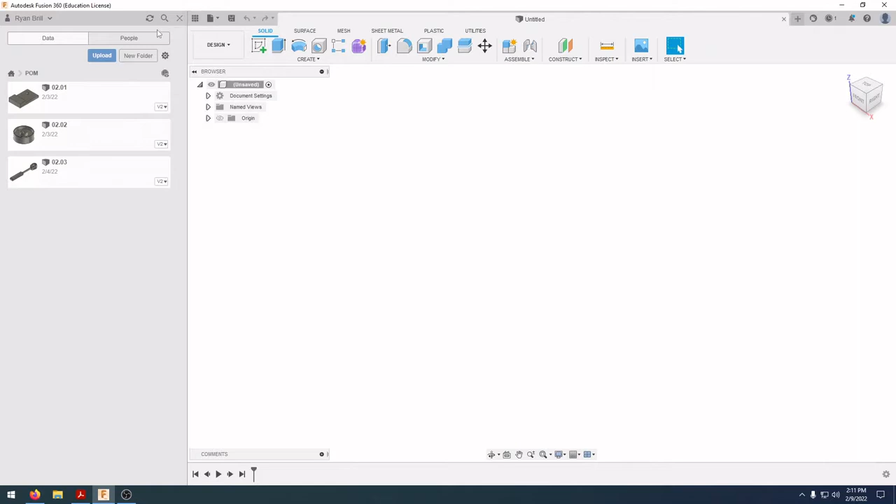So let's go to Fusion 360, and in here what we want to do is make sure that we are in the proper folder in our design area. Click on the waffle and open up our data panel, and in here I'm in my Principles of Manufacturing, right where I want it to be. So what I want to do is save this as 2.4 and click Save.

Now to start out, we're going to create a sketch, and this is going to be on our XZ plane. Remember, Z is on our blue axis, X is on our red, and Y is on our green. So I'm going to select our XZ axis right there.

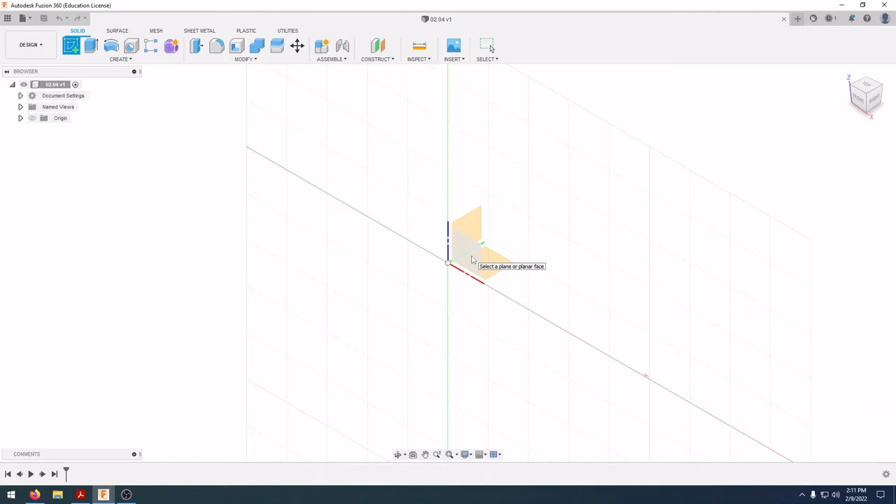We'll look at the prints, and we see that this is 3 inches tall overall, it is 2 inches wide from there to there, and we've got a little knob. What I'm going to do is split this in half and create the left-hand side of this, and then I'll revolve this around that center axis.

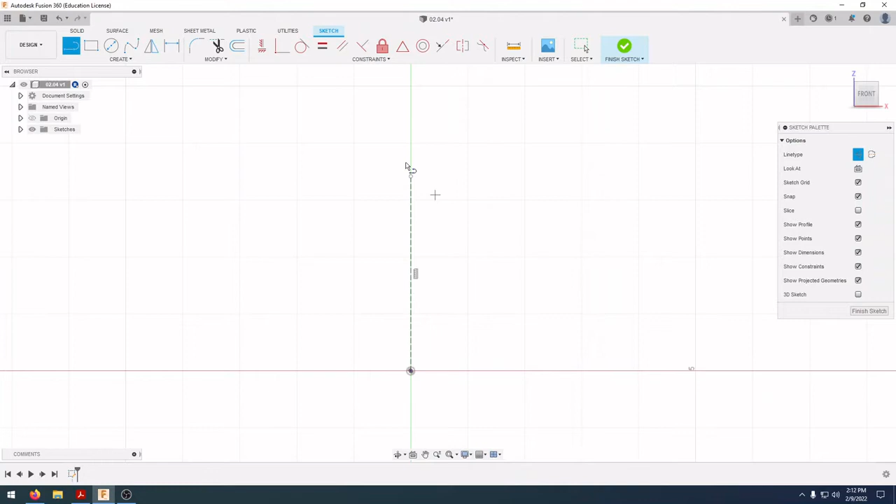So we'll go back to Fusion 360. I'm going to create a line, and I'm going to make this a construction line so that we can revolve around it. I'm just going to go from my origin up at least 3 inches, could be a little bit more. Mine's 3.5 or so.

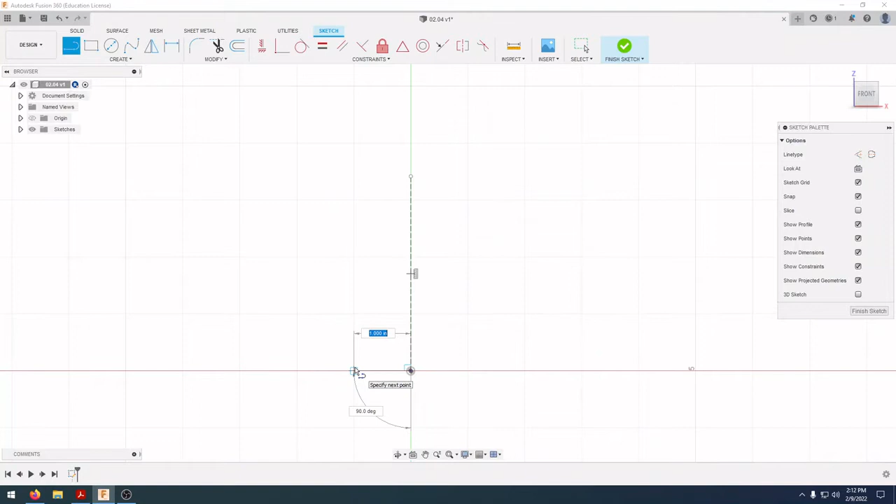Then from there, I am going to make another line, but it's not going to be a construction line, it's going to be a standard object line. According to the print, I'm going to go over an inch, and how I found that is my diameter is going to be 2 inches. I want to take half of that, which is an inch, and click on the center right there. I can type in an inch, hit enter, and then I'm going to roughly create the rest of that shape right there.

So we'll go back and take a look at this again. Overall height is 3 inches, and from the bottom to that corner right there is going to be 2.75, and then finally the width of that corner is 0.25.

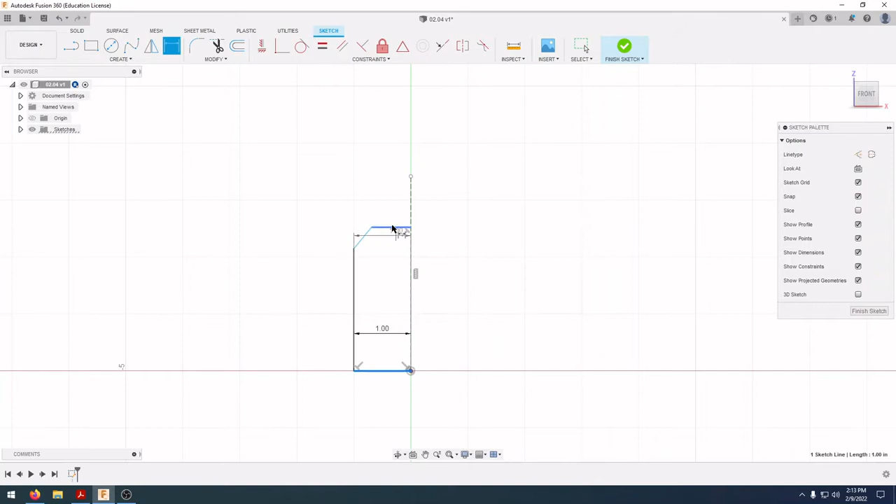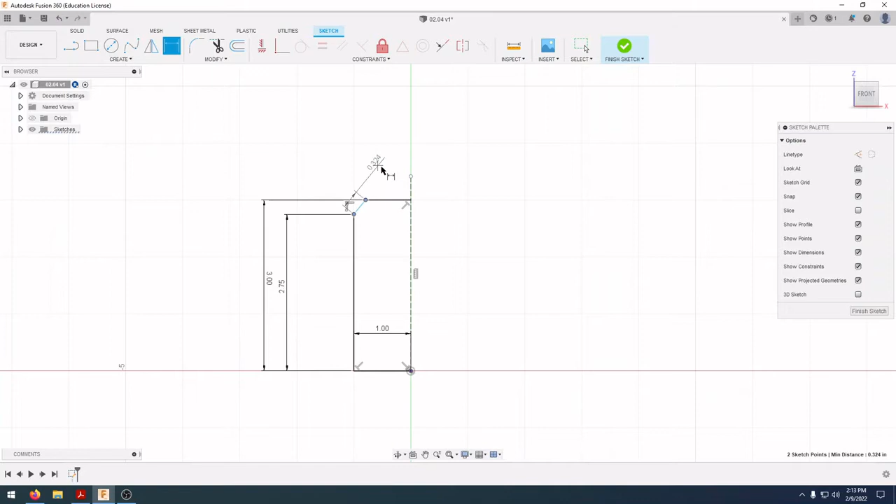So when we're back in here, we'll click on Sketch Dimension or Create Sketch Dimension, or you could also hit D on the keyboard. We go from the bottom to the top, that's going to be 3 inches. Then we go from the bottom to this point right here, that's going to be 2.75 inches. And then at the bottom right there, we go from this corner to that corner, and that is going to be 0.25.

So there we have the rough dimension, or the rough outline of this, and it's fully constrained. What I'm going to do then is create a circle right here that has a diameter of an inch, and we're going to dimension it, and then we will trim away from there.

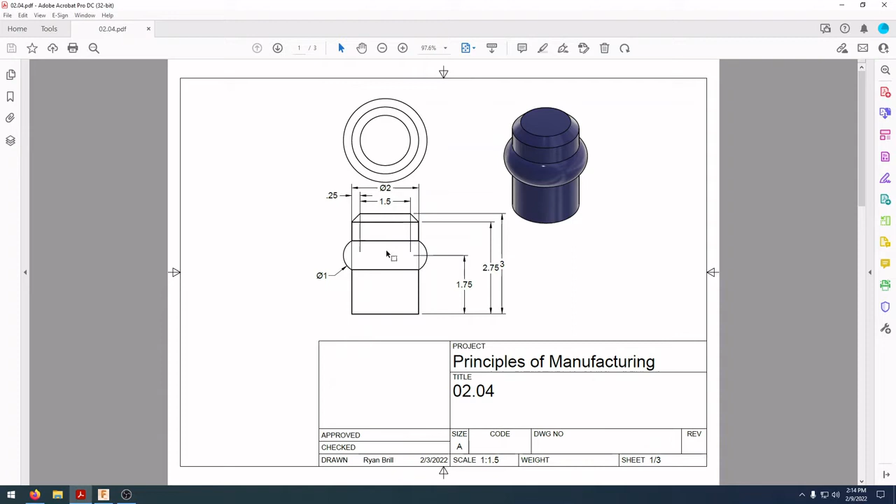So my circle, I'm just going to draw it right there with a diameter of an inch. And we're going to look at the location of it. It is 1.75 up for the center, and it is 1.5 inches from the center to the side, or from the center point it's going to be 0.75.

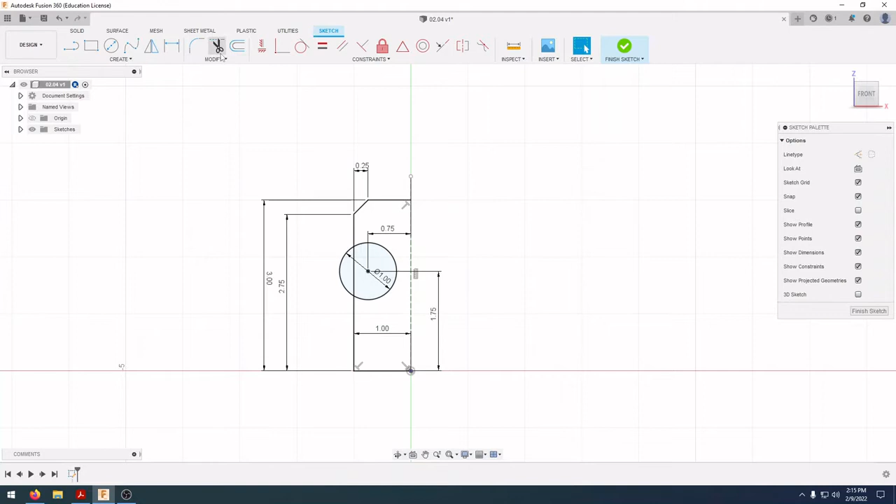So I'll come back here and we'll select our dimension tool. Going from the bottom up, that is going to be 1.75, and coming from our center over, that is going to be 0.75. From there, in our modify area, we're able to trim, and I'm going to trim out the center of this circle right there and that center line right there.

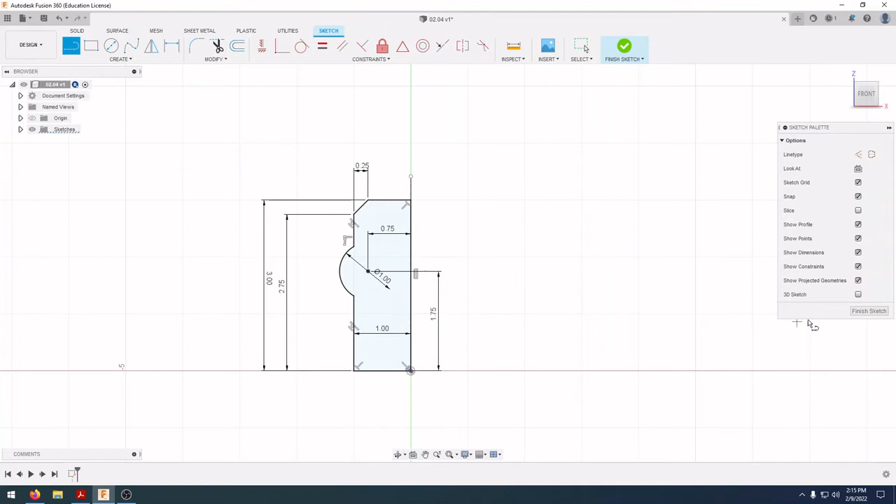So now I'm going to close down this sketch. If you noticed before, I did not have a filled-in area, so if I wanted to revolve this, I wouldn't have been able to, because it was not completely filled in. But I took a line and closed it down, and now we have a fully closed, fully constrained sketch. So I'm going to finish that sketch, and I am not going to extrude it, I'm going to revolve it.

My profile is going to be this profile, and my axis is going to be that construction line I put in before. We're going to go all the way around, and then I'll hit OK.

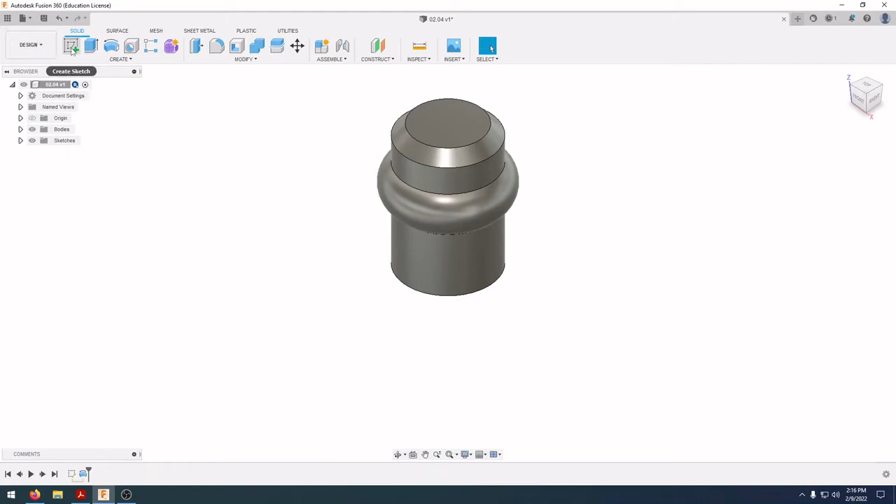The next thing we're going to do is sketch the pathway for our sweep of one of the arms for our wheel. I'm going to create a sketch, but instead of putting this on an actual face, because we just have rounded faces right here, I'm going to put this on my XZ plane so that I get a solid, flat surface to sketch this on.

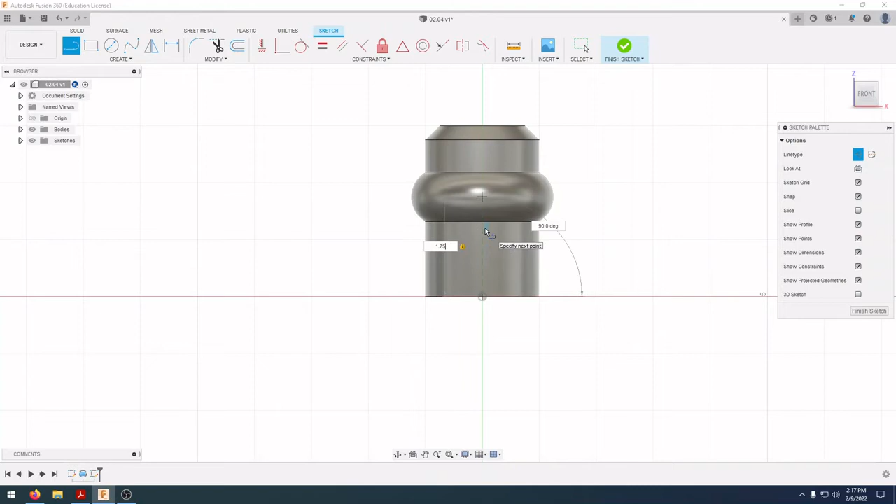The construction line I'm putting in from here to here is going to be 1.75 inches. So back in Fusion, I'm going straight up 90 degrees, 1.75 inches, and that's going to get us into the center of our round right there.

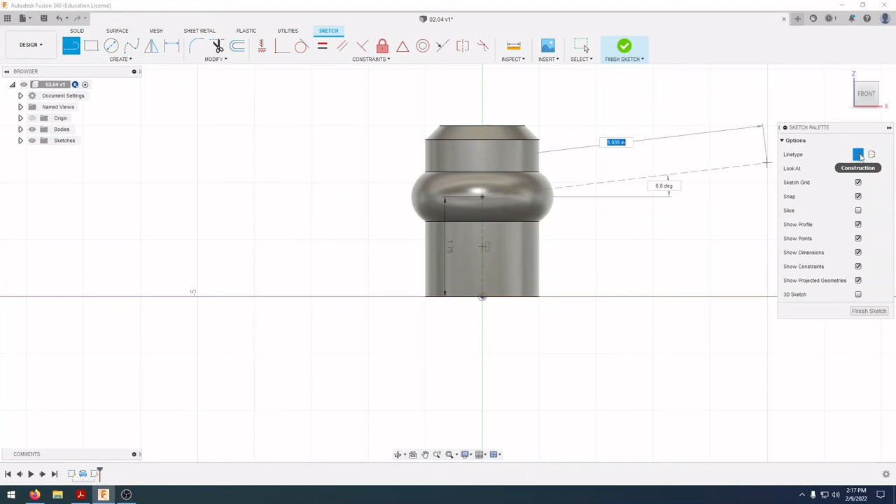The next thing I'm going to do is add a horizontal line there. We're going to have two arcs and then a smaller horizontal line over there. Fusion makes this very easy. I'm going to click on the end point of that - I forgot to turn off the construction, so we want to make sure this is an object line, not a construction line. I'm going to go straight to the left, making sure it's horizontal.

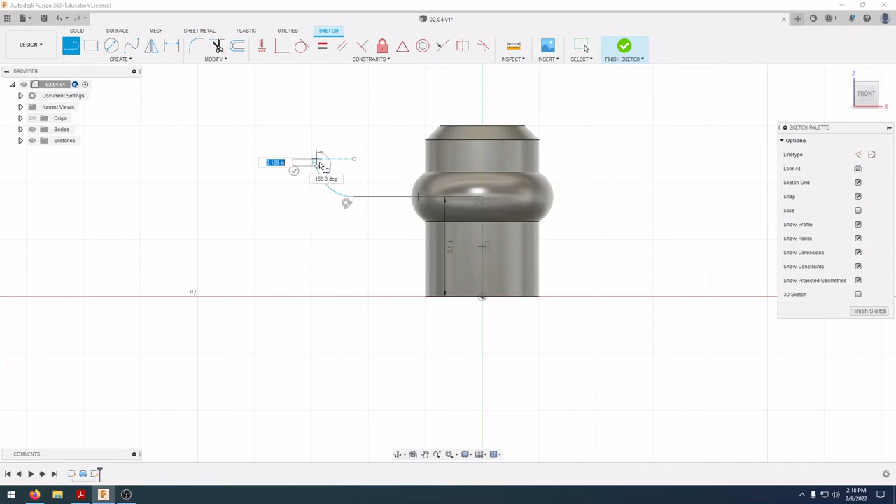Before I start drawing my next line, I can create an arc out of here. I bring my cursor back to the end point, click and hold down, and I'm able to make a tangent arc. Then I let go - I'm not going to dimension anything right now, we'll come back to that later. I do the same thing right here: bring the cursor back to the end point, click and hold, and create an arc coming over here. Finally, we create a straight line coming out from there, and click the little check mark to finish.

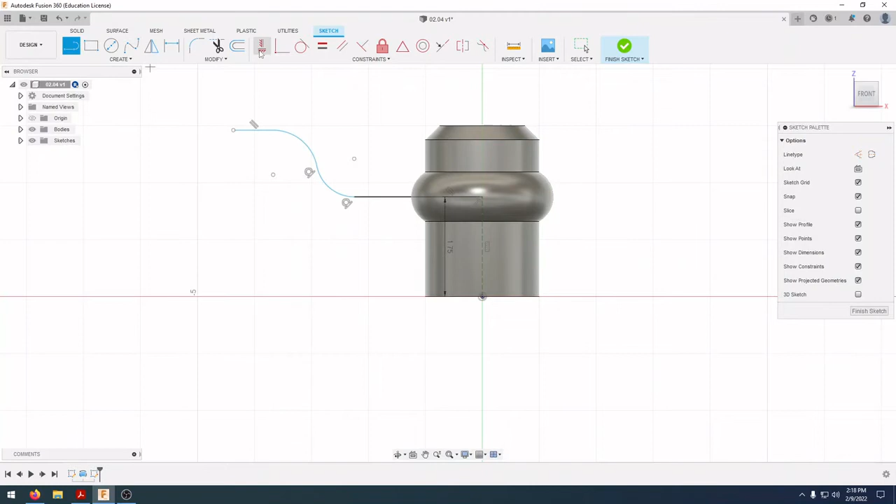Back here, I'm going to type D on the keyboard for dimension. From there to there, that's going to be an inch, and from here to here, that's going to be 2 inches.

I notice here that I lost my constraint of being tangent. If we want to put that back in, we can click on our tangent constraint, click on that arc and that line, and that brings it back in so we have a nice swooping pair of arcs right there.

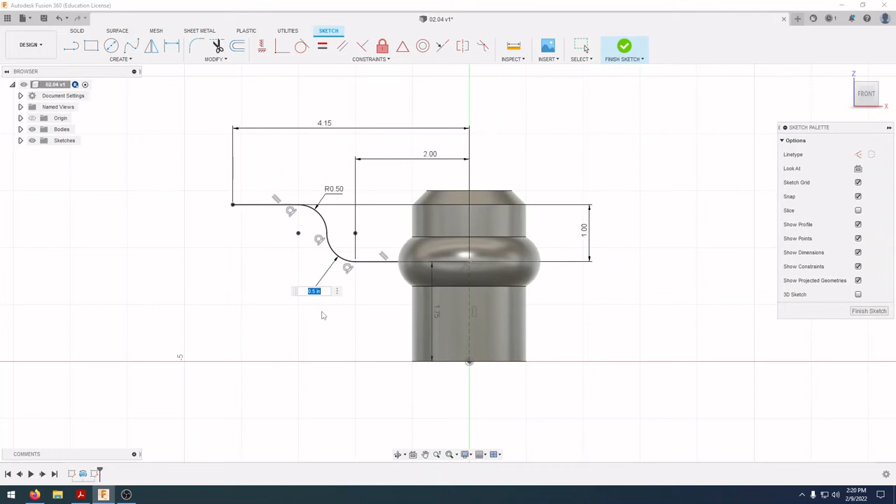Radius of 1 inch, diameter of 2. This is fantastic. If you want to change your dimensions, we can just double click on it and type in 1, press enter. Double click, type in 1, press enter. And now we are finished with that sketch right here.

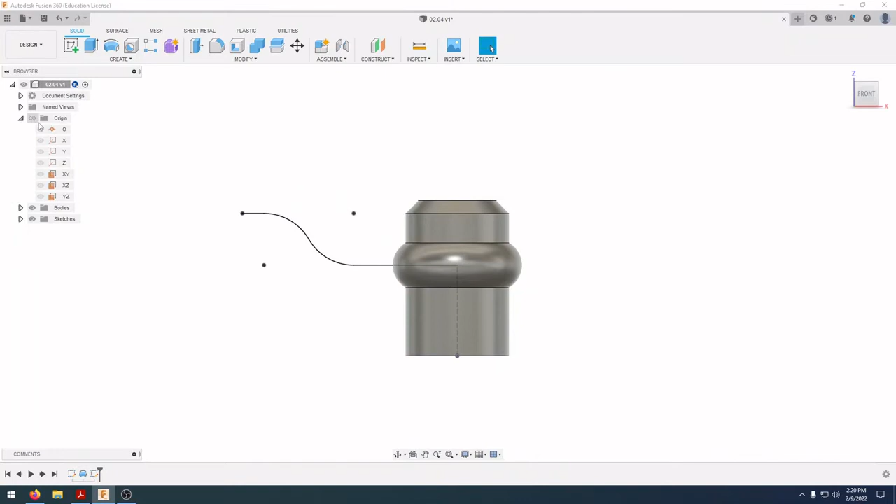So the next thing that we want to do is create a secondary sketch that's going to be on this outside face, parallel with the ZY plane, or the YZ plane.

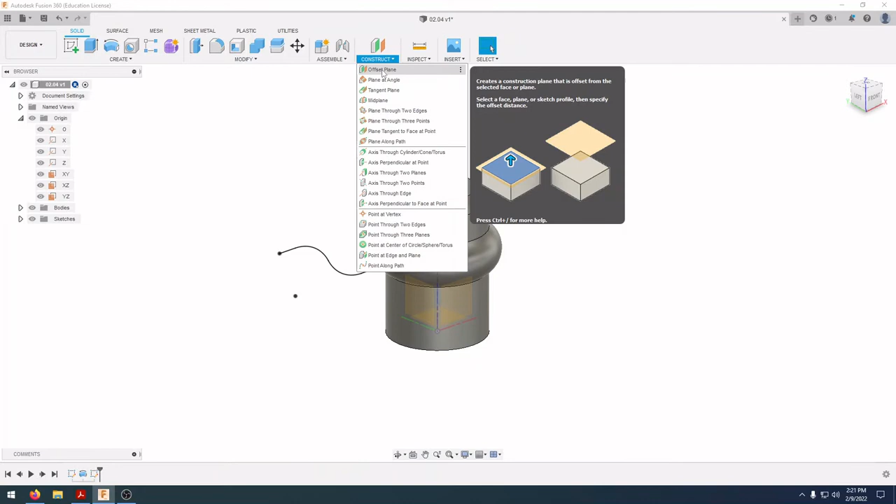So we're going to want to have a work plane out here, so that we're able to make a sketch to follow that, to be able to sweep that tool path we just created. So I'm going to go back to Fusion, and to create that, I'm going to create an offset plane, select my YZ plane, and offset it at negative 4.15.

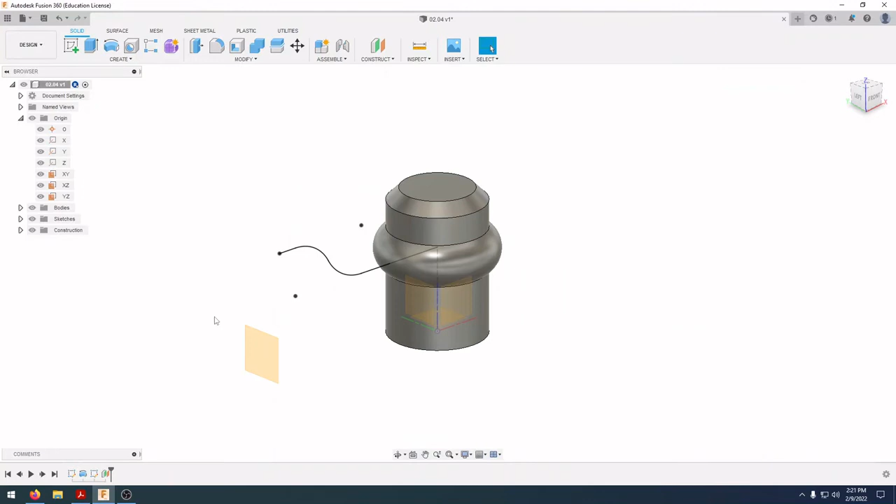And where I got that dimension from is the length from this center line to our edge right here, so that plane needs to line up perfectly with the end of that sketch. After I have that construction plane in there, I'm going to create a sketch and put it on that construction plane.

And I am going to create this rectangle right here. How I do that is I create a 2-point rectangle, and I'm going to dimension this so that it is 1/2 of an inch by 1/2 of an inch.

And what I want to do is make sure that this point is in the center of that line right there. So 1/2 of 1/2 of an inch is 0.25.

And if I want to make this line align with that point, I'm going to use a coincident constraint. So we click on that line and we click on that point, and it brings that into place. And now our square is completely black, meaning that it's fully constrained.

The next thing I want to do is create an arc. This will be a 3-point arc. We'll click on that first corner right there, and then that second corner right there. As I bring this up, it will snap so that both of those corners are tangent, at that perfect 0.25 radius.

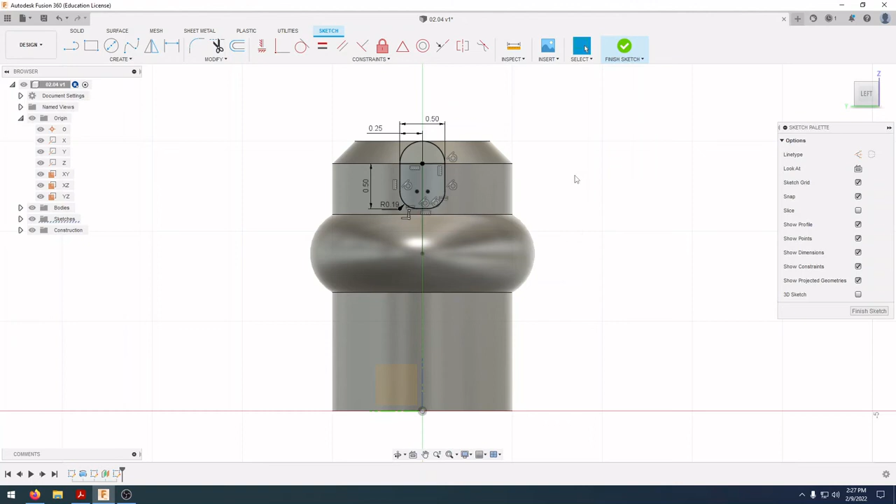So now that our sketch is fully constrained, what I can do is finish that sketch. And what I want to do with this is have this sketch follow this line, kind of like an extrusion, but instead of an extrude, we call this a sweep.

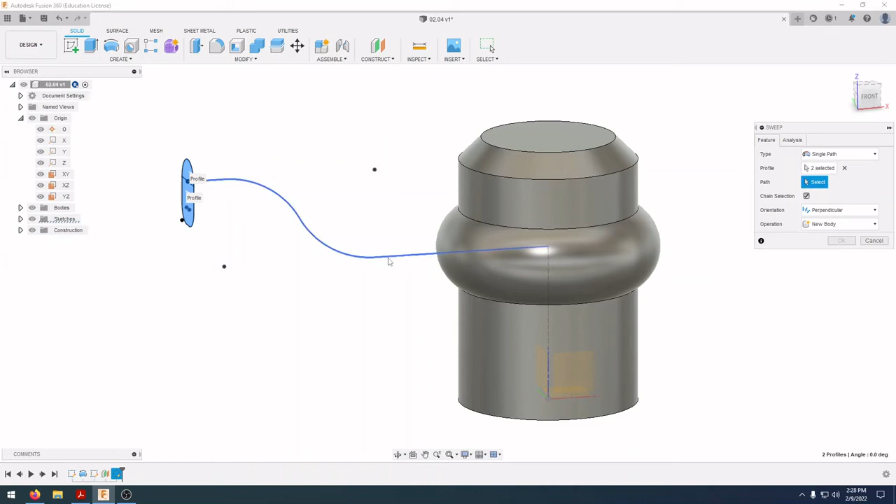So I click on Create, click Sweep, and I'm going to select that top profile and that bottom profile. We can see that we have our 2 profiles selected. On my path, I'm going to select that. And it defaults to cut because I'm going into another part, but instead of cut, I want to click Join, and we are able to make that first arm of our part.

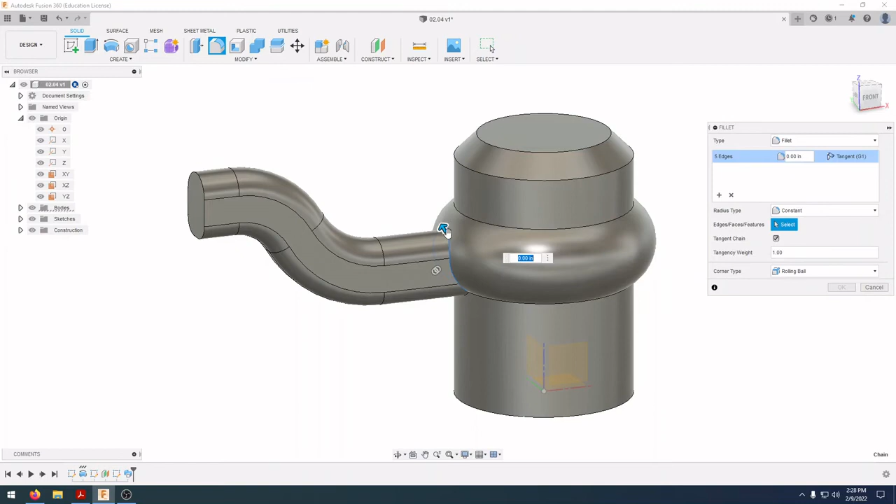The next thing we are going to do, according to our prints right here, is we have a 0.25 radius fillet on the corner. So I'm going to come back to Fusion 360, and put a fillet on this corner of 0.25 inches.

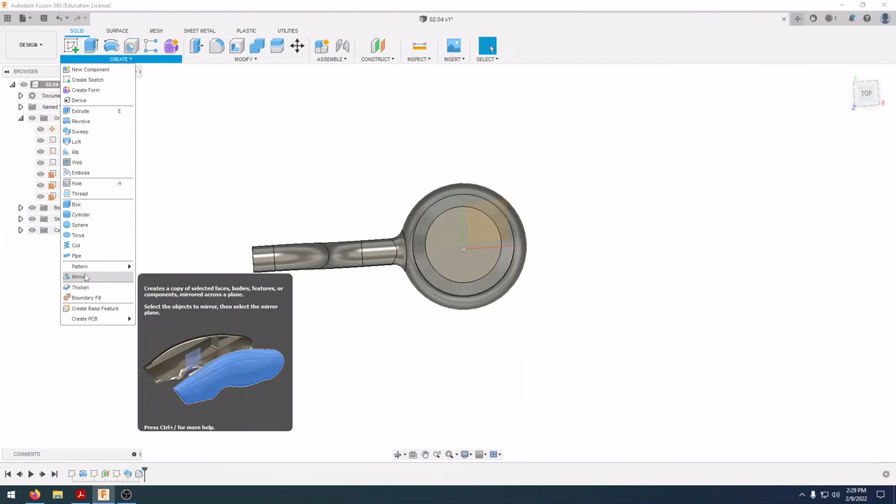So once we have that, we have our first arm done. What I'm going to do is copy this as a circular pattern 2 more times for a total of 3 pieces. To do that, we go to Create, down to pattern, and we have a circular pattern right there. We click that.

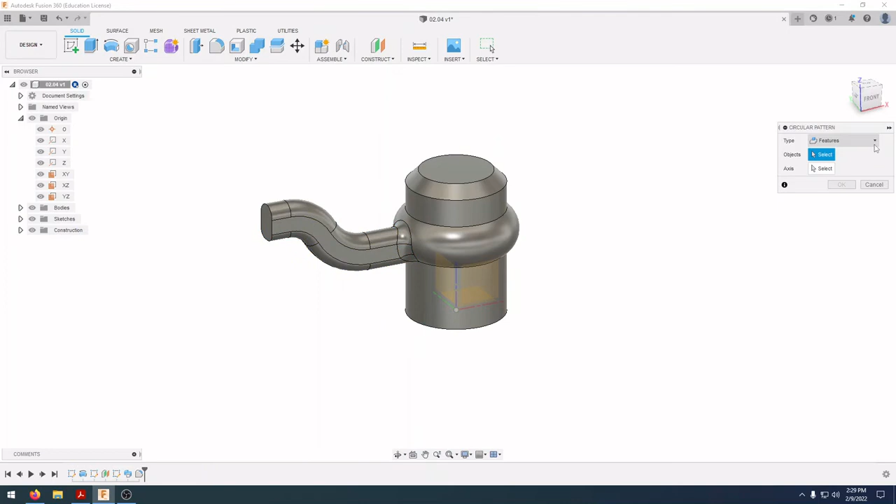In here we can select faces, bodies, features, or components. I'm going to click on features, and for our features I'm going to click on the arm and our fillets. That allows us to select those. If I were to just do faces, I would have to select the entire thing. But to make it quicker and easier, I'm going to go down to features and select that feature, and select that feature.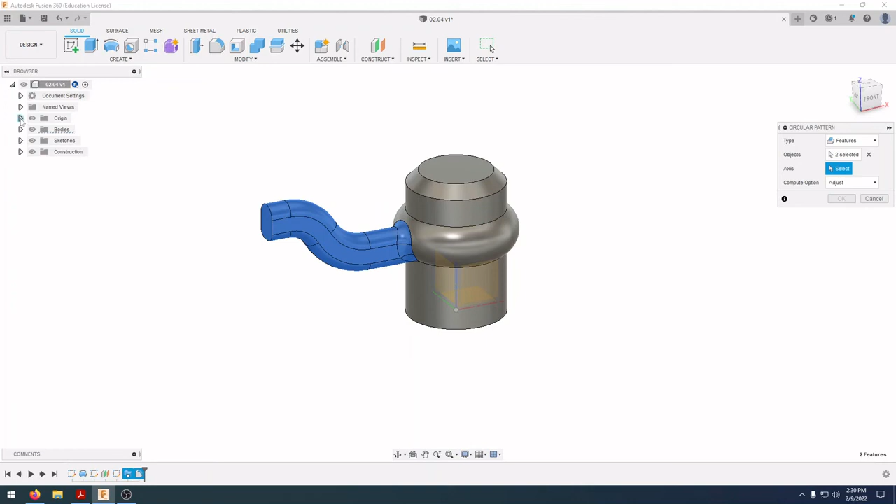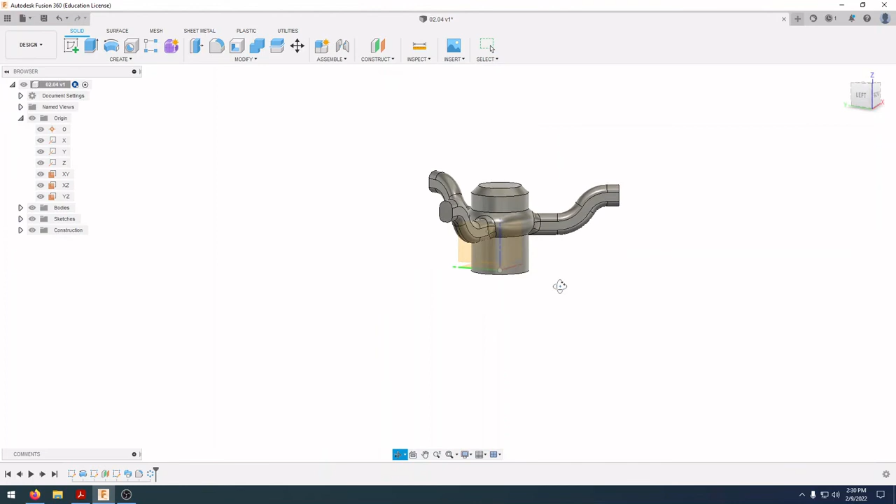For my axis, I click on that and select my z-axis. If you don't have your origin open, you can still select your z-axis. If it doesn't default to a quantity of 3, we want to change that to 3. But if I wanted to do 4, I could do 4, and it will automatically update how many I need. I'm going to change it back to 3, then press OK. Now I have 3 even arms.

We have 2 more things to do. The first one is we're going to make a loop along with those fillets, and then finally we're going to put a hole in the center there.

To be able to make this ring right here, I can take a look at this. We have a radius or diameter of 1 inch, and it's going to be 4.15 from the center to there, and 2.6 up.

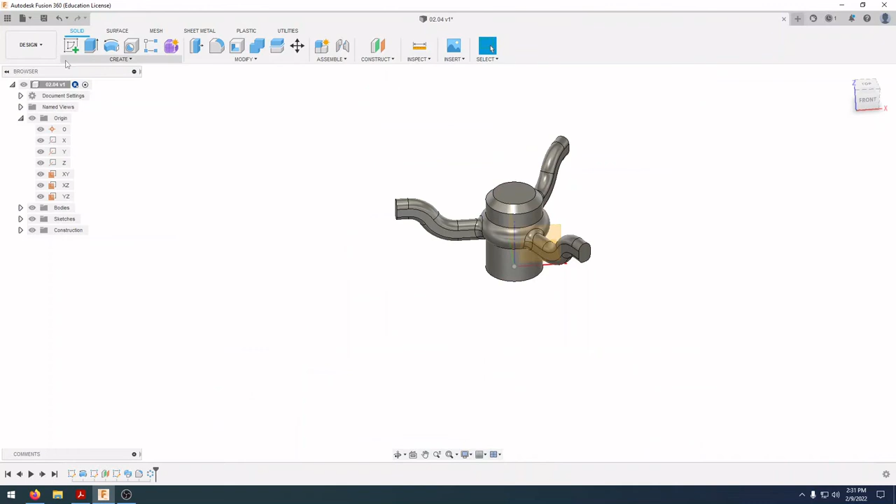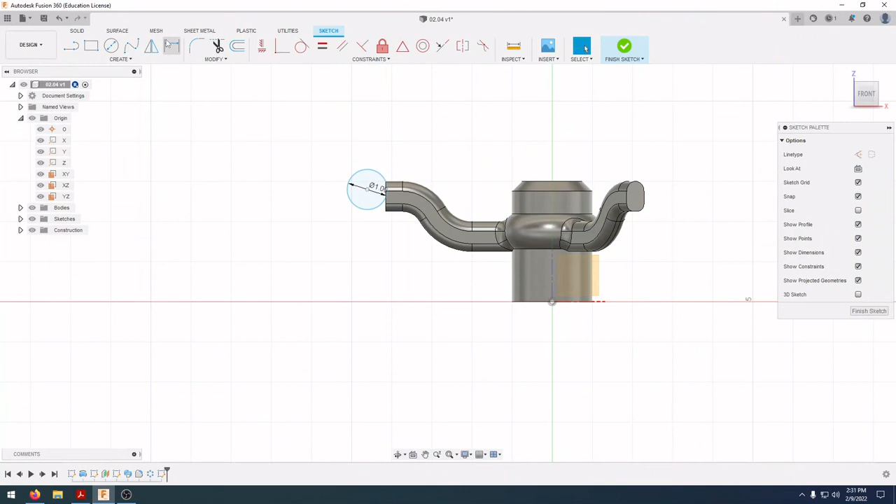So we'll come back, and I'm going to create a new sketch on my XZ plane, and put a circle out here with a diameter of 1 inch. Again it's going to be 4.15 inches out and 2.6 inches up. So dimension in the center, that's 4.15, and the last one is 2.6. And we'll finish that sketch.

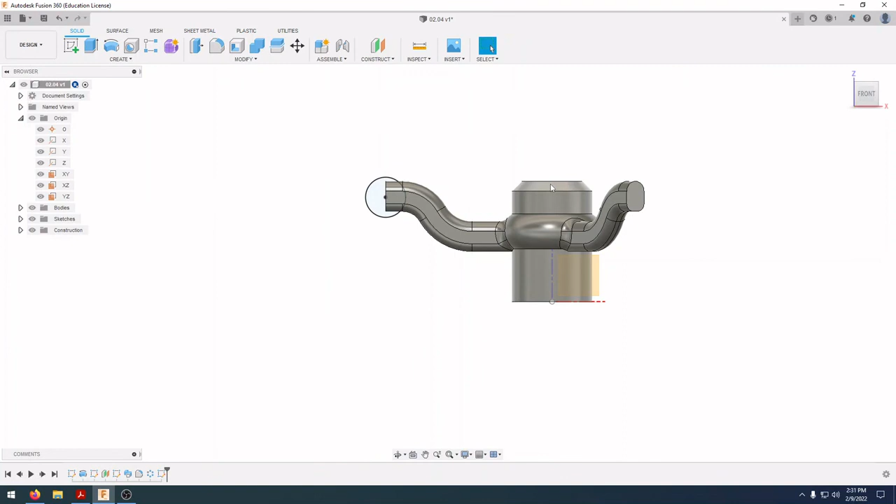To finish this off, we're going to create a revolve. So that is our profile that we're going to be using. Our axis, we can select our z-axis, and that will go around. Because it's touching solid objects, it's assuming we want to cut, but we want to join these.

We press OK. The last thing we are going to do before our hole is put 1/4 inch fillets. So we select fillet, and put a 1/4 inch fillet there, there, and there.

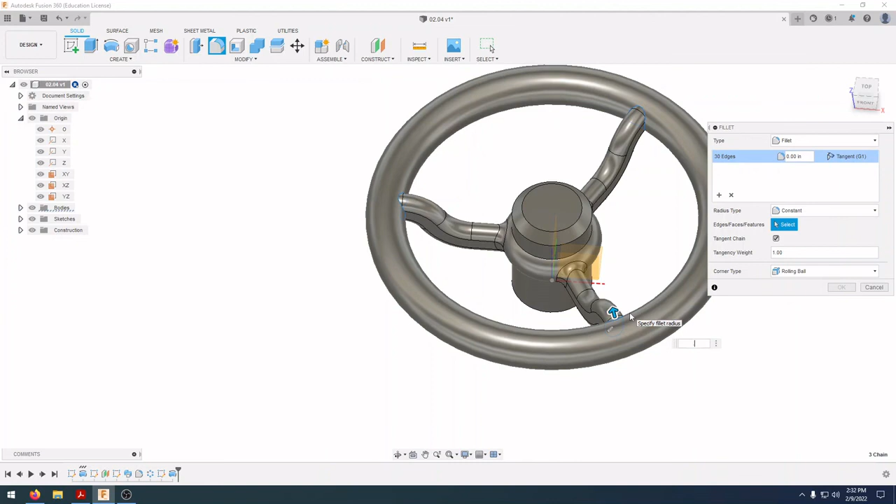Finally we want to put a hole in the center of this. If we look at our print, we need to make a hole that goes all the way through at 1/8 of an inch in diameter. On the top here we have a counter bore, which is going to be a diameter of 3/8 of an inch, or 0.375, and it's going to go down 1/4 of an inch.

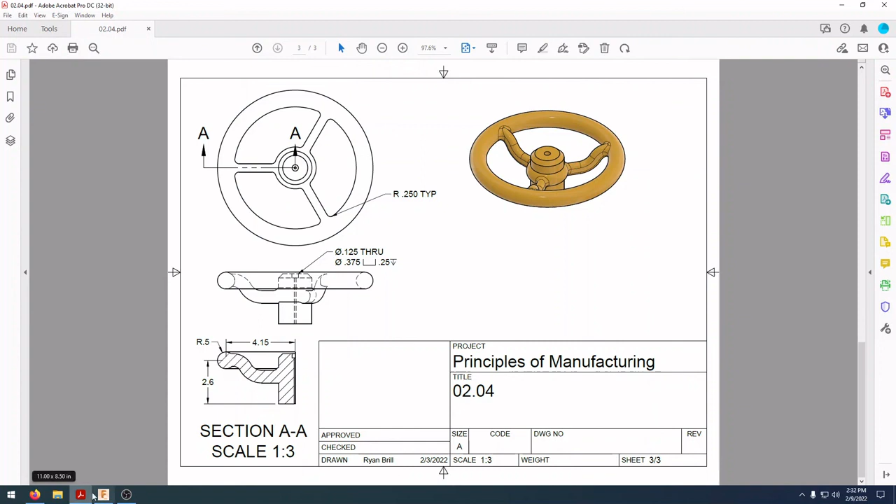Inside Fusion we have a nice tool called the hole tool for that. I select the hole tool, and it's asking me what face I want to put it on. I want to put it on this face, and for my reference, I want it to be the center of that circle. So I selected that reference and that circle, and it's going to put it right in the center. Now, what type of hole do we have? We have a counter bore.

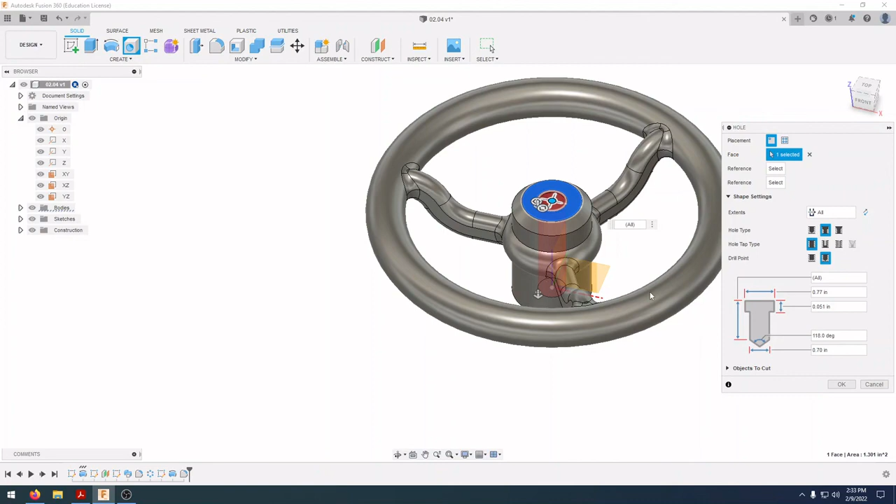My distance is going to go all the way through. So it goes all the way through. I don't need to tap it. It doesn't matter for the drill point because I'm going to be going all the way through.

The outside diameter for this, according to our print, was 0.375, so I come over here and set that to 0.375. My depth, found right here, is 0.25, so we change that to 0.25. Then my width, according to my print, is 0.125, so we change this bottom to 0.125. Once we have all those settings in, we press OK.

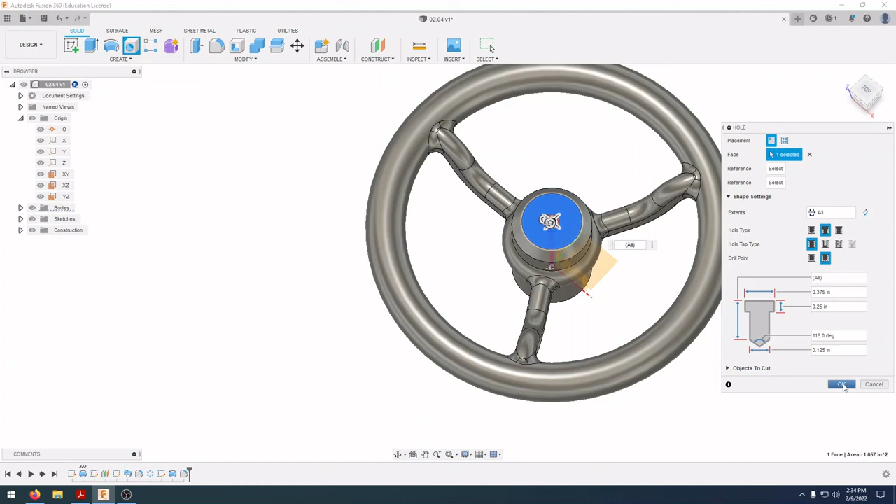And there is our completed wheel. When we are finished, we want to save this. And then we are complete.